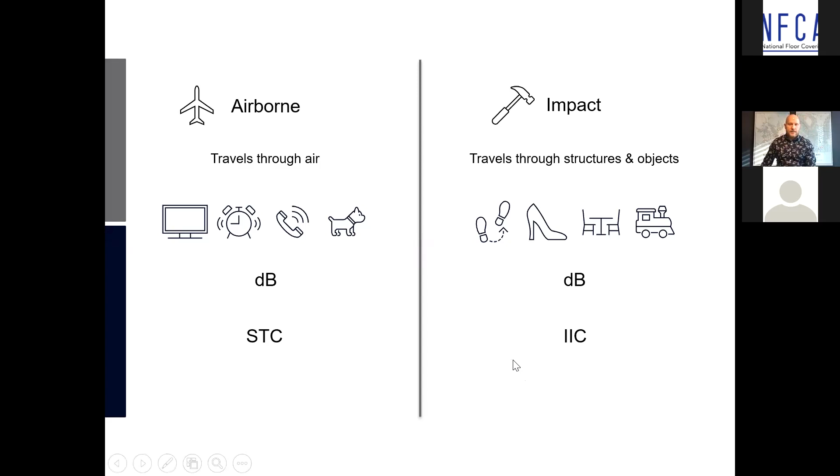Here's one thing I will mention about this. You'd be amazed how people will confuse the two or not necessarily know what the real issue is or where it's coming from, and they almost put it all in the same basket. Understanding where your issue could come from or what you're more concerned with can go a long way, because they absolutely do not work the same. The principles aren't the same. They're related, but they're not the same. So ultimately, anytime we assess a situation, you have to understand there's two, they don't work the same, therefore the treatment may not be the same. So looking into the fine print goes a long way.

It's all direction. So one of the differences with the STC and the IIC is the sound can originate from everywhere, meaning you could be transferring the sound from the unit on the left side of you to the right unit, top to bottom, bottom to top. So for example, if you're in an existing building, you're saying, my neighbors are making noises. Well, is the sound coming from underneath? Is it coming from the top? Is it coming from the side?

So depending on the situation, we'll understand that the STC is all direction, hallways to a unit, whatever it may be. And it's also related to a wall-to-wall assembly or a floor ceiling assembly. So it's always about the assembly. We'll touch on that a lot on March 9th, but one of the biggest mistakes we see is not understanding how the sound actually works, where it's coming from, where it's going, and what it is going through. So it's always wall-to-wall assemblies or floor ceiling when it comes to the STC.

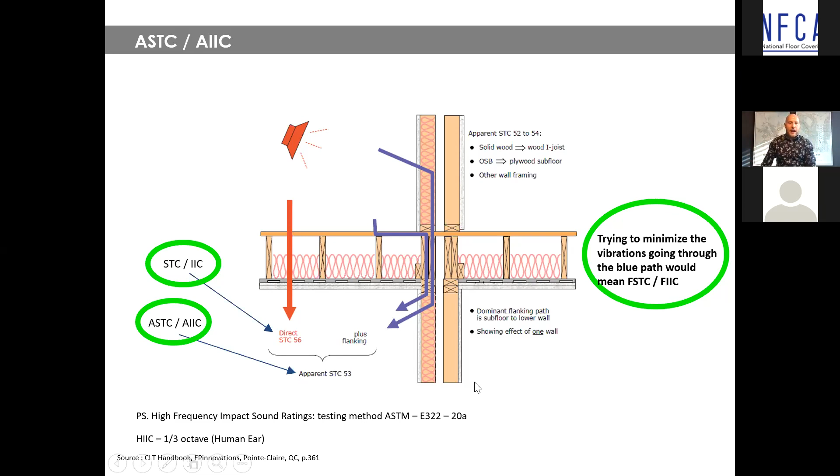So what I'm saying is, yes, there's the STC and IIC, same thing with ASTC and AIIC, but we're able to go even more in depth as far as analyzing where we're more prone to the sound transfer, which frequency may become more problematic, and fix it at the design stage. So just to give you an example of how deep we can go within the science, okay?

Building code requirements and recommendations. Chris, can you do me a favor, please? I'm not going to go into the chats. If ever you see questions coming in that you think I should answer on the spot, don't be afraid of jumping in there. Yeah, absolutely.

I just was going to comment on the previous slide. What you're saying there is, there's always been value in dealing with this at the design stage. If you want to stop noise transference meaningfully, the designer has to do it. By getting very targeted about how you could do that, you've upped the value even more of dealing with this before the building is built.

Without that sort of approach, construction is so guilty of being reactive as opposed to proactive, and we try to deal with these problems as they crop up. And that's why the person rolls into the flooring showroom and says, have you got an IIC of 1000 yet? I need that. Do you know what I mean? Absolutely. And so again, the data and what comes with the data, we'll talk about in a minute, looking at what the building code recommends or requires. But you're 100% correct, Chris.

Speaking of which, the code in Canada, we'll focus on that for a minute. The STC is required by code, and the number's 50. They also recognize the ASTC, so it is 47, basically 3 points less. The recommended minimum STC is 55. In the acoustic world, very rarely do we see people shooting under that. Usually we'll see people trying to shoot within that recommendation, if not higher.

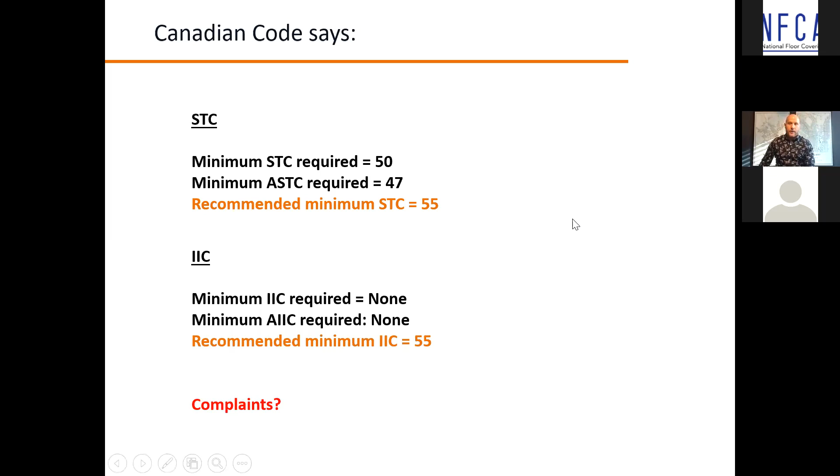So we are seeing a lot more, and the percentage I shared earlier of noise complaints and whatnot, I'd be willing to bet anything that 90% of those complaints are IIC within that same ratio. So once again, food for thought into wherever and however you're working on that.

To touch on what you said, Chris, to see high numbers, and the flooring industry could not be more guilty of this, and we are quite frankly trying to change the game and have for years, does that mean that all of a sudden, if you have a high number on a product, an underlay that's claiming a 76 IIC as an example, is it a guarantee of high performance within your building? Absolutely not. Absolutely not.

Can these numbers be achieved in my building? I don't want to conclude too fast, but I would say that anytime you see anything over 62, 63, 65, that's pushing it on any of the STC and IIC, there should be a red flag right there. There should be a red flag that it's virtually impossible to achieve unless you have a wicked carpet tile or a 1970 shaggy carpet.

So ultimately, the hard surface flooring industry particularly, there's no way any structure with anything we see in Canada would shoot much over these ratings in real life. So we obviously have a problem on our hands and we need to fix it. And one of the ways to fix it is to understand how it actually works.

And ultimately understanding, which is the next point, what your floor ceiling assembly is, what is it capable of, where is it more prone to having issues, what floor covering are you going to be using, is there a ceiling, is there no ceiling? All these components put together allow us to come up with some suggestions on what the assembly could look like. But what's even more important is, what is the rating that should be associated with those assemblies? And I assure you that IIC 75 and STC 72 is not it.

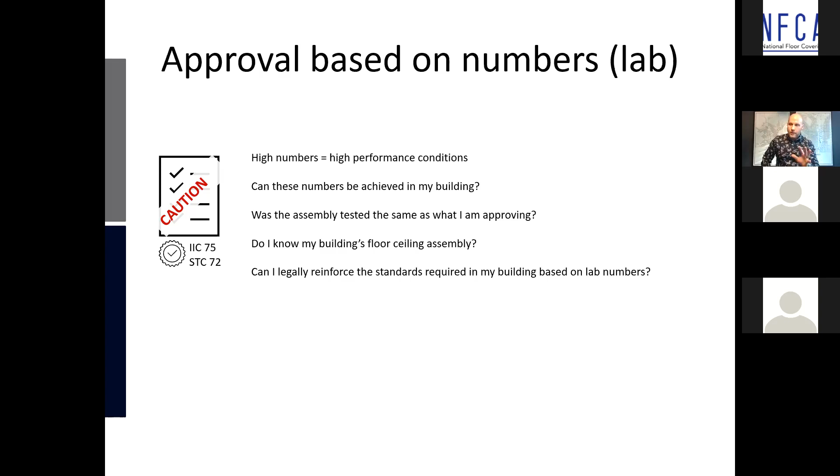Andre, quick heads up. You're at 30 minutes. Yeah, thank you.

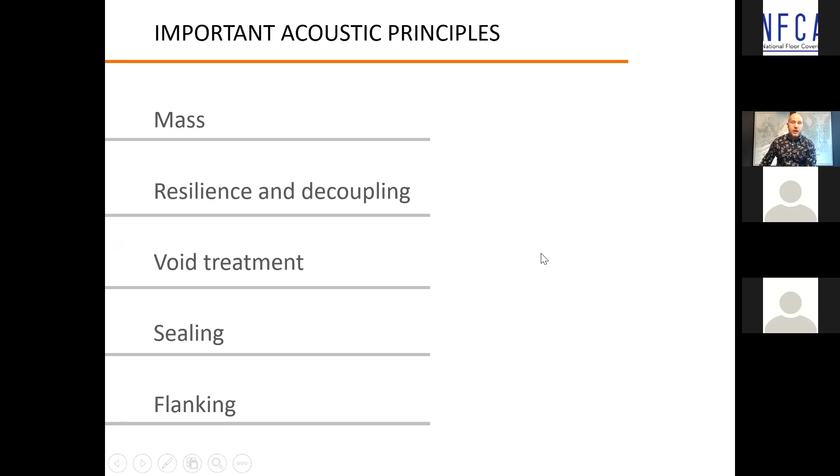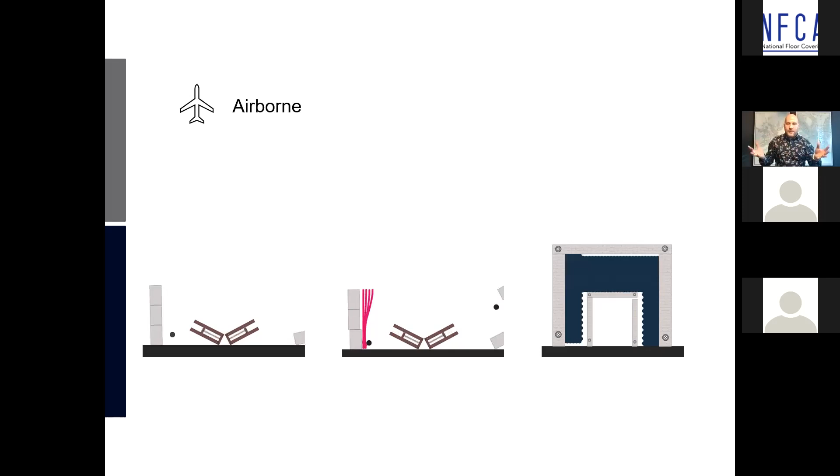That's true with vents, openings, even hotels that have big gaps under the doors. You can have the best door in the world, but if you have an inch of air underneath, you're going to hear everything that's going on in the hallways. So that's a very important principle too. Obviously, in the flooring industry, I'm not saying you have control over all of them, but it's important to understand them.

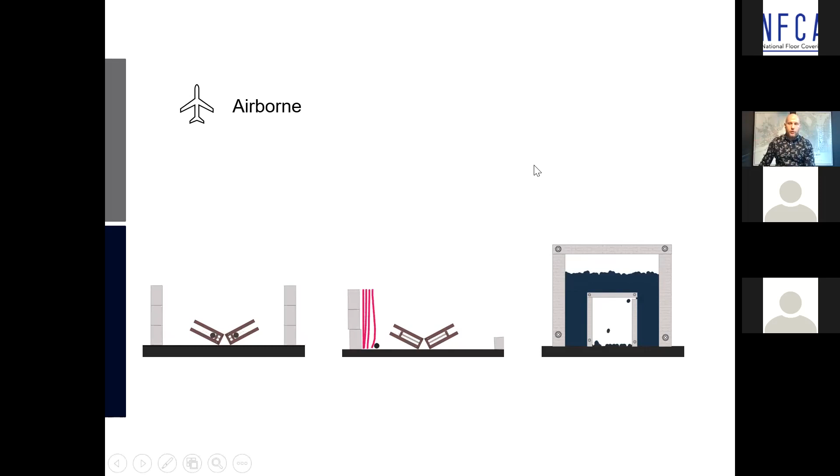Impact, by far the most neglected by a stretch. If you look at the left video, vibration, impact transfer is ultimately our worst enemy, because the impact, the IIC, will travel from one component to another and will make it to the unit below. So yeah, we're good on STC, we got some mass, but if we don't find ways to decouple the materials from each other, that's why carpet is so good. But if we don't decouple the components from each other, ultimately that's when we end up with an IIC that's quite low versus an STC.

So the key to this is, how can we find a way for the vibration to have nowhere to go? If you're on a concrete, you have one shot at doing it right, so we're better off picking the right technology. For example, in our group, we're not limited to one technology or one product line. We have a multitude because we're playing with decoupling, concrete, light wood frame, steel, mass timber. Are we more prone to high frequency or low? All these things come into play when it's time to slow down the impact transfer.

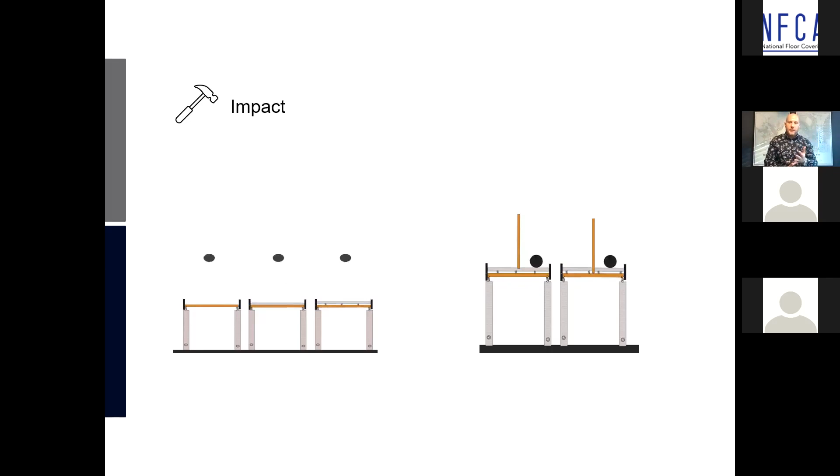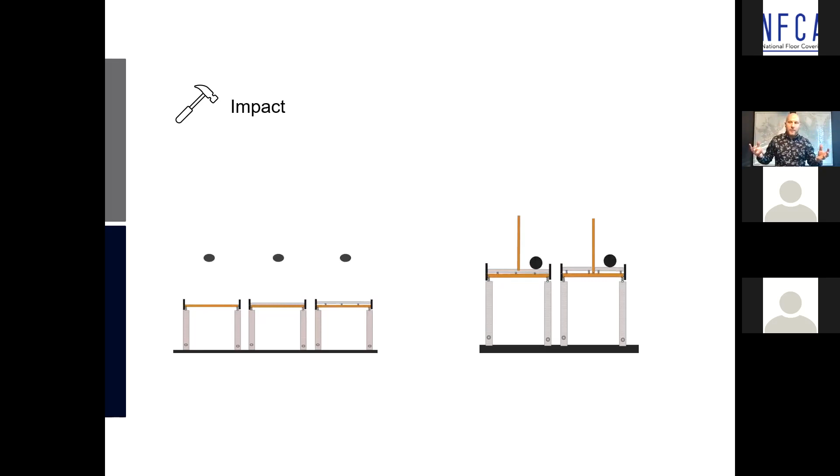Two things you guys are familiar with that work the same way: electricity and heat. For example, thermal. If you don't put your hand on the element on your oven, you're not going to burn yourself. You create a physical contact, you will. So bottom line is, acoustics on the impact works the exact same way. This is also related to flanking. If the vibration's making it to the structure, it's making the whole thing vibrate, and it's our worst enemy. So the sooner we control that vibration, the closer to the source of the impact we control it, it does not have time to gain speed through the structure.

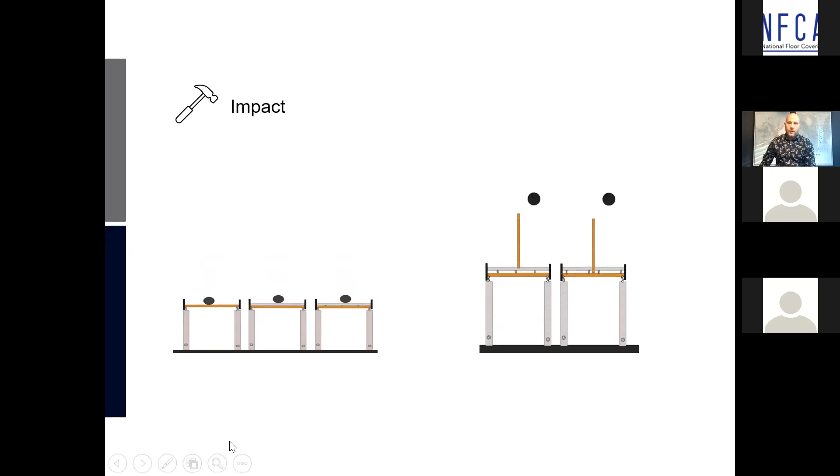I'll do a quick demo for you on this, so hopefully you'll hear well. You see my beautiful cooking plate there. So music box, nothing special about it. What I'll do is I'll play it when it's not touching the board, then I'll play it when it is touching the board, and we'll see if you guys can hear the difference. So hopefully it came. I tested it with Lee and Chris before, so it worked.

But ultimately, what that displays is, if there's a gap of air, air is not a good conductor for vibration. As soon as you introduce it to hard surface flooring, a hard substrate, I don't care if it's a concrete or gypcrete topping, no matter what that is, density within anything between the floor to the ceiling, drywall, if it's not decoupled, you're going to end up with a lower IIC. That's how the science works. So it's a matter of picking the right thing at the right place.

Structure types. I'll share some data and information, and again, this is coming from 1,000 tests in our database and 20 years of doing this in different structures. And why is there a section on structure? You'd be amazed how often we see people saying, well, I'm on a concrete structure, so I don't have to worry about the IIC or about sound. You'd be amazed how many complaints we see that come from concrete structures or concrete towers versus others. So they're not free from complaints. I'll give you some examples on that and what we're looking at.

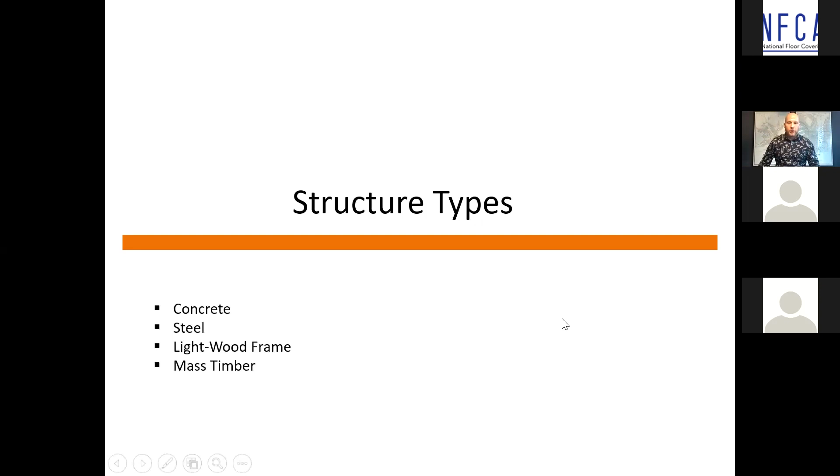Concrete, obviously mass, we have a lot. Steel, same thing. Light wood frame, not as much. Mass timber, not as much. So as far as flanking, lower risk for sure of the vibrations, the building's heavier. Steel is high risk, it's metal. So a steel structure, we need to pay attention to the principles, including decoupling. Light wood frame, even more true, and mass timber. Okay, so it's extremely important out of the gate to understand what we're working on. What's the structure going to be? What are we going to be more prone to transfer versus something else?

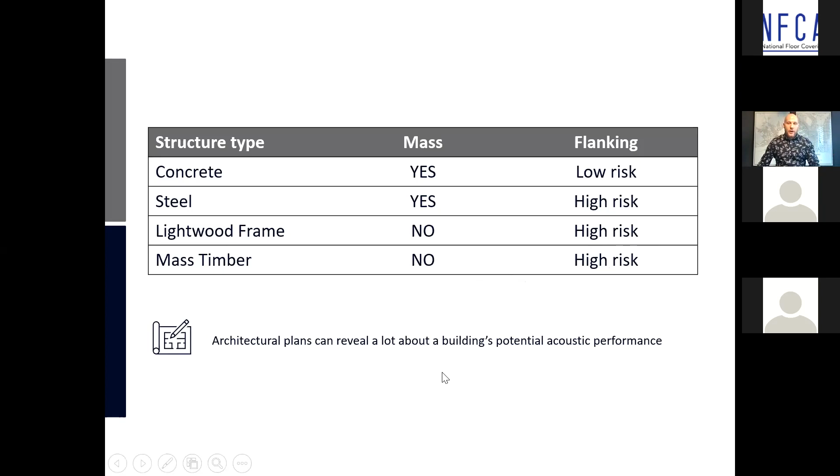As far as concrete, quickly, large spectrum of efficiency. The IIC without any floor finish, 28 to 36. Of course, to Chris' point earlier, sometimes we'll see people trying to find an IIC 36 slab in order for their products to look great. But in reality we'll see slabs that will be 28 naked with nothing on top, or it'll go to 36.

So a polished concrete on its own will sound absolutely terrible when it comes to IIC, specifically the high frequency. The high frequency versus low frequency is more problematic on concrete than it is on anything else. So the low frequency, because it's heavy, is not as problematic. But the high frequency, high heels or hard soles on your shoes, toys, moving furniture that doesn't have any felt pads and things like that, is problematic.

You'd be amazed to hear an actual tapping machine on it. It goes right through. You still have obviously different thicknesses, framing levels, structural plans, but great for STC. We still need to pay attention to the IIC. This is, again, coming from 20 years of dealing with property management companies, existing buildings, and new construction.

So Andre, that 28 to 36, is that a 6-inch slab or an 8-inch slab or just a general statement? It's related to all of it, Chris, because depending on the thickness, I've seen 8-inch slabs shooting 28. I've seen 6-inch shooting 32. The bottom line is we don't always know. That's why there's a range. You're not going to know out of the gate. There's no guarantee that the slab is going to shoot 36, even though it's 10-inch.

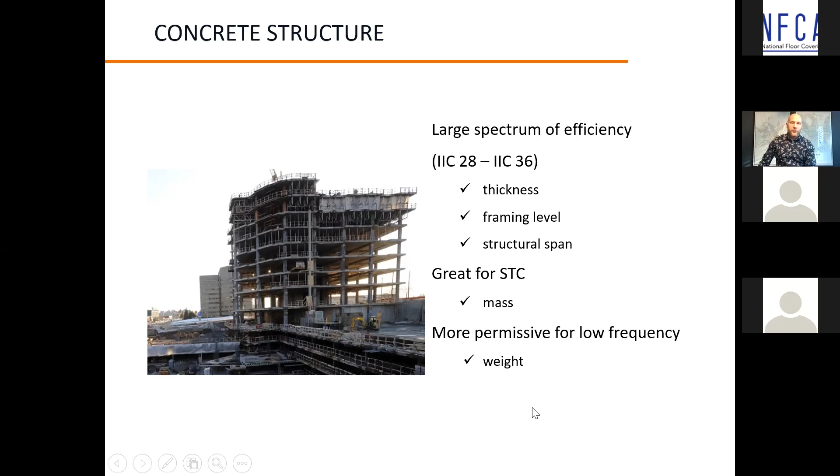Yeah. But the biggest point with that too, Chris, is it's not sufficient on its own. And the biggest issue is the high frequency. That's why the code even came up with the HIIC, right? So we can basically know which technology will perform better on what structure. Okay. Yeah.

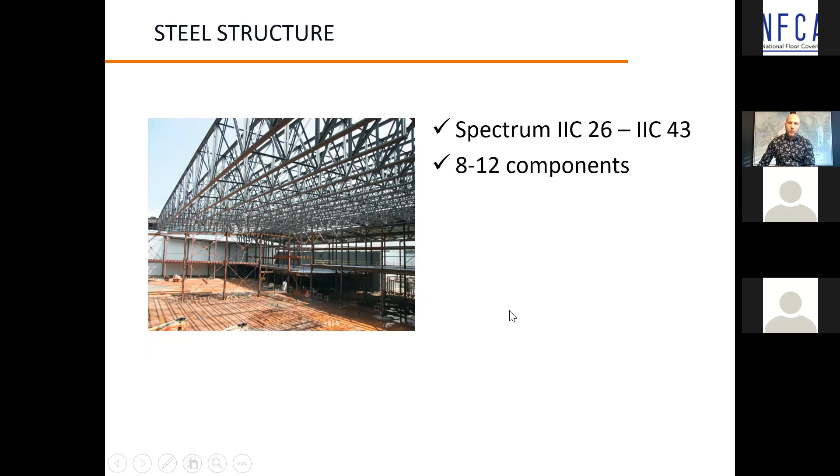This is the steel structure. Really quickly, 8 to 12 components. Again, 26 to 43 for that 4-inch of concrete. If you look at light wood frame, naked, no floor finish, 26 to 43 to start. It competes against concrete structure, usually very problematic, but it has the potential to outperform concrete buildings. We're doing it day in, day out, and I have tons of examples. If we apply the principles in a light wood frame application, we can do crazy things.

But right now, usually what happens is a floor covering, some kind of a pad, or an LVP or LVT with a backing, gypcrete or concrete topping directly over plywood, joist system, some insulation, resilient channels, 2 layers of drywall. Put things in perspective: AIIC 47 if you're lucky. So that's an important point to underline. You're saying there is hope for wood frame in this whole topic. 100%. That's really positive. I like that.

I was in a building just the other week where we got access to the above suite and the below suite. The below suite was where the complaint was being generated. So I went upstairs, and with the owner up there, we dropped a water bottle full of water from 2 feet onto the floor, it was actually LVT, vinyl plank. Then I went downstairs and phoned her and said, okay, do it again. I want to see this test.

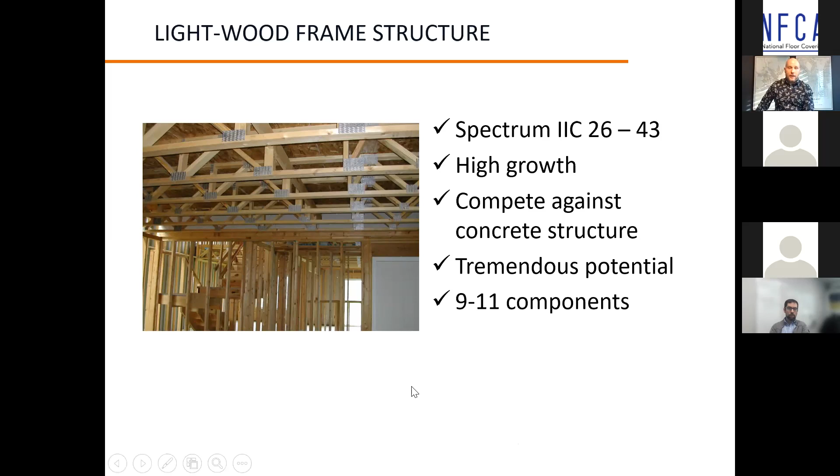I've seen floor systems and whatnot where we're not paying attention that will shoot 47, 49, and you would think you're in good shape, but you're actually not. So it could be a nightmare pretty quick, but there are ways, and I'll show you a few things in a minute, but there are ways to basically make a light wood frame building very efficient, both on STC and IIC.

Mass timber, that's the new kid on the block. You're going to start seeing this a lot more. Ironically enough, everything I just said about light wood frame applies. Meaning, if you look at the slab alone, especially if it's exposed ceiling, exposed mass timber, CLT, glulam, whatever you want to call it, in some cases, it will shoot on the IIC alone with no topping, as an example. It could shoot, we've seen 23. So you're starting with a couple strikes. So that means that if you don't have anything in the ceiling, you better do a heck of a good job over top. Good news is there's hope.

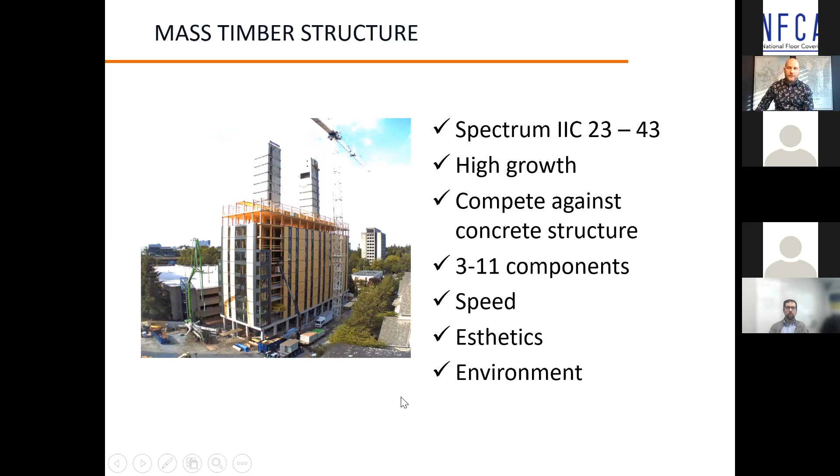There are assemblies that are designed to basically mitigate flanking, mitigate the STC, mitigate the IIC, high and low frequency. So there are ways to do that. But it is something that we're seeing a lot more of. We're currently working on many of them. And sound is by far the #1 concern. No questions asked. And that's a good thing because some people paid the price a few years back when they actually started plowing the trail. So we're going to start seeing a lot more mass timber buildings.

And just a reminder, the National Building Code advisory, it's not a requirement, it's just a recommendation, is 54 or 55 for IIC. Yeah. 55. And honestly, Chris, it's a heck of a battle to get there with mass timber with exposed ceiling. If you put a ceiling, you're fine. But with exposed ceiling, it's all about knowing what the expectations are. So obviously, we're all about mass timber. I love the idea of using wood, but you need to ask these questions, and we need to have these conversations at the beginning, not later on in the process. And that's something I'll touch on March 9th.

So modern minimalist kind of design approaches don't lend themselves well to acoustical issues. Correct. We start paying attention, we work together, we're collaborating with the right people, you can do awesome things. And it's better than having to figure out the solutions after the fact when everything's installed. So that there's no doubt. Very quickly, I'm just showing you some potential ideas of what that could look like.

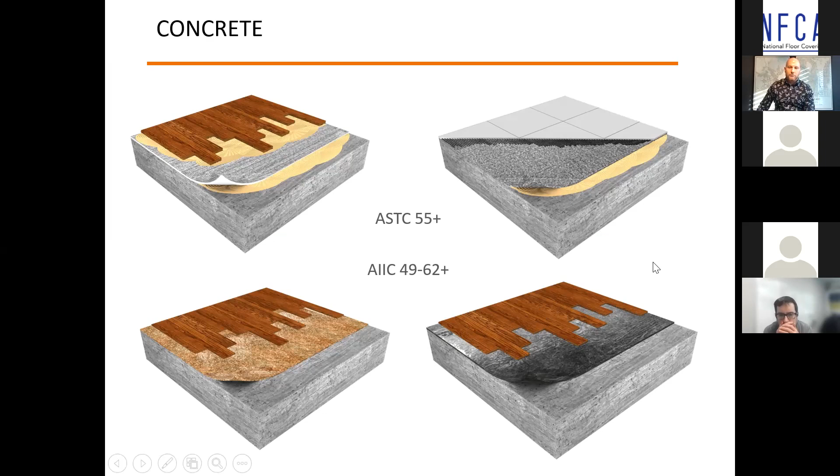Again, I've mentioned concrete slab. You only have one shot at doing it right for the IIC and for the high frequency. So it's not as easy as saying, I'm just going to use a 3 mil foam, it might save the day. That's not how that works. It's using the right thing in the right place. Again, I've touched on that and I have stories, I have examples of real builders that were stuck in the 47 range on the IIC, and overnight we brought them to 60. By the way, without a topping.

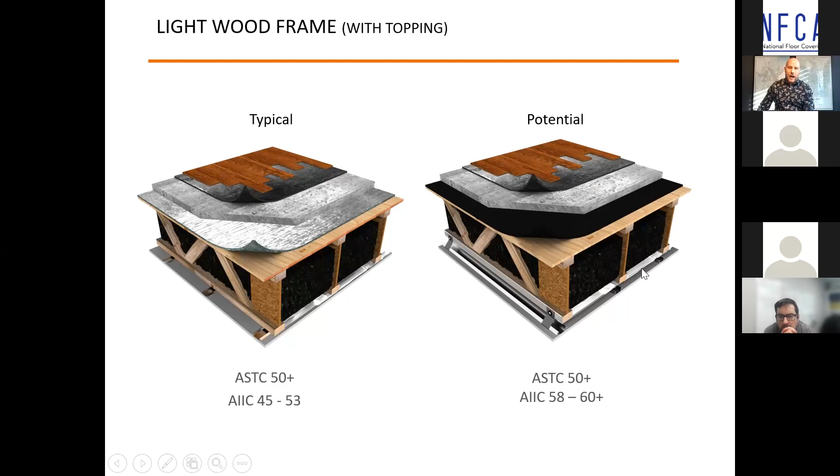So as you can see here, there are new ways, new technologies available. And that's even more true when the weight is a concern. Victoria, BC is an example. We do a lot of work there. We work with BC Housing. So there's a lot going on there, but there are new ways to approach sound insulation with the flooring industry and in the construction industry that can bring the comfort that people are looking for without necessarily having to change everything we've been doing. So there's hope, especially on the light wood frame and the mass timber industry.

Andre, I think you should make the point here. If you're able to up the IIC rating by 2 or 3 or 5 points, that is a significant achievement. I mean, the whole IIC rating system operates kind of like the Richter scale, right? A jump of 1 is a huge difference. Exponential. There you go. Absolutely.

I'll give an example, Chris, since you mentioned it, going from a 47 or 50, like the number of times we see an 8-inch slab with a laminate floor that shoots 50, you'd be amazed. People think they're in the 60-ish or 70s. It's not even close. So bottom line is, it's fairly easy to go from 45 or 50 to 52, 54, 55 by using the right thing.

In some cases, it's not even more expensive. It's just a matter of using the right technology that's going to cover you on the curve. So if you don't understand where you're prone to transferring sound, you may control something that's already controlled. So the reason that we do what we do is we're able to look at basically what's more prone to transfer and where do we actually need to compensate.

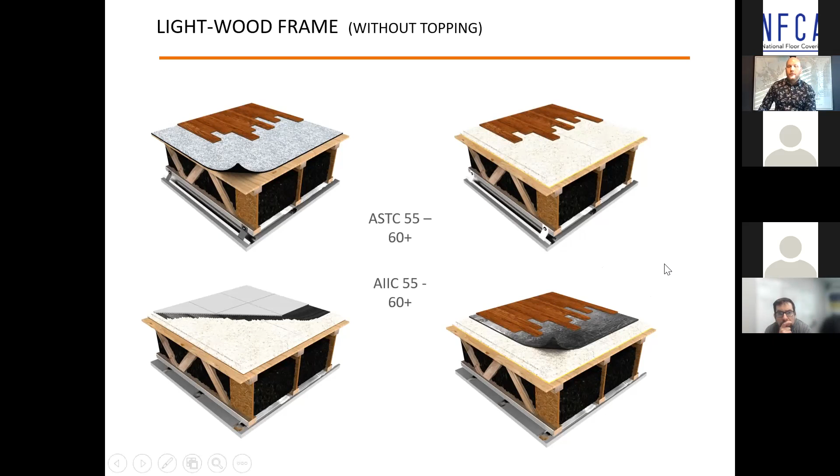Right, because the code on the ceiling, ironically, because of fire, will put their foot down a lot. When it comes to sound over top, there's the typical topping and 8-inch slab, but the new innovative ones, like you see in front of you, we have all the data you may need, but that doesn't mean they're listed with the ULC as we speak. Okay, so there's no association or place, like a website, that you can go to? Correct. And by the way, we do a lot of buildings with those. Okay, thank you.

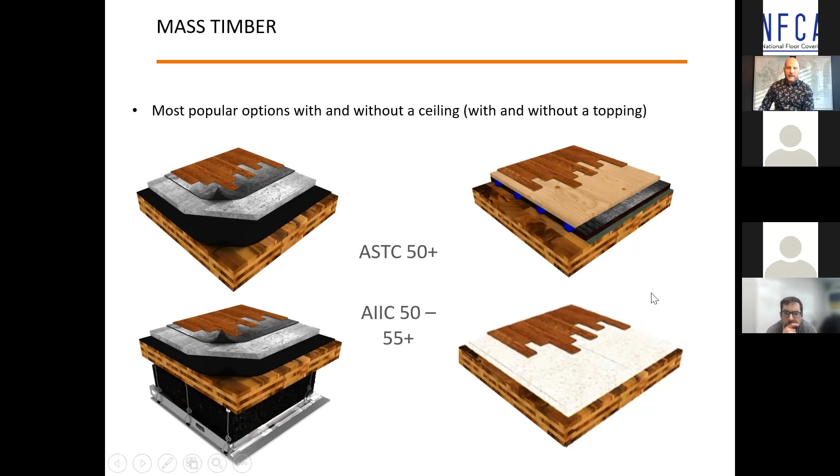And this is basically on mass timber, because I don't want to take one minute more. These are mass timber assemblies. Once again, dry elements with a topping. There are ways to do a heck of a good job, avoid complaints, and make sure that the building has the reputation it needs to have. So again, this is a small sample of some assemblies that are available in the market.

Same thing with steel structures. You'd be surprised how much steel structure is prone to flanking. So we need to control flanking out of the gate. So there are systems in the ceiling and under the floor, insulation. I just spoke to a builder in Victoria a couple of days ago where I made some recommendations on a Hambro system for their commercial kitchen. They reached out and talked to us about it, so I made some recommendations, understanding what they were trying to do.

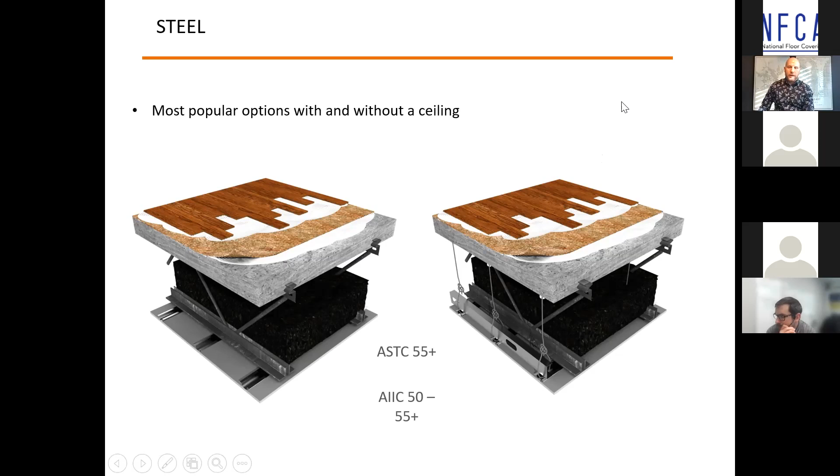And I know we're pretty much there, Chris. So recap and takeaways: requirements versus expectations. I don't mean to preach, but Mr. and Mrs. Smith do not know what the code asks for, nor do they care in 2022. So what should we offer them? Should a builder offer a little bit more value on that? We work with developers that are literally making acoustics their number one selling feature in their condos. That's what they talk about first, before anything else. That's where it's going.

That doesn't mean you have to be out of pocket. It means that ultimately people are willing to pay for peace of mind. There's no doubt about that, and we're seeing it day in, day out. Acoustics requires specific attention. The ratings equal an assembly. Understand the principles and try to apply them as much as you can. We're there to assist you should you need. Know your structure: concrete is not the same as light wood frame, steel or mass timber. What's your target? Then you can find your proper assembly and options.

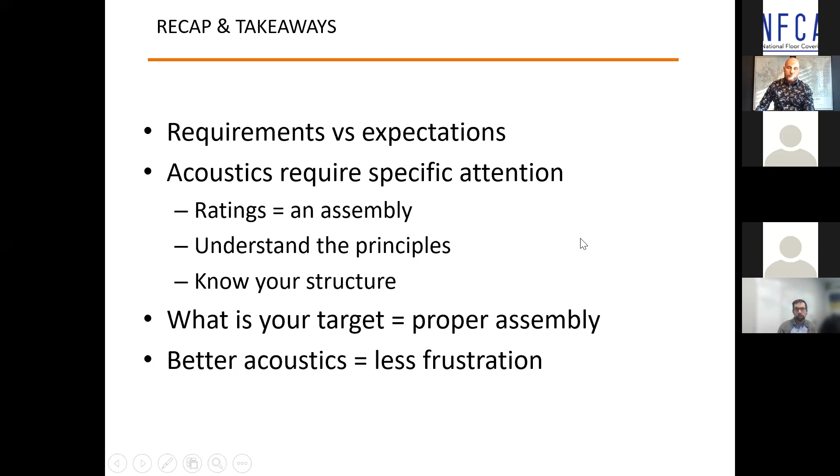And better acoustics equals less frustration. I could tell you stories all day long about stratas and people for whom it's a nightmare. And to some extent, we've decided as a group to change that and try to at least contribute to people having a little bit more peace of mind.

And before we go to questions quick, because I'll finish with this: if ever you are working on something, you have questions, or I know you'd like our guidance, go back to the first slide, obviously we would be happy. I got my whole team, Gordon Strachan from Vancouver, Christian Wallace, Ontario, and parts of the US. And I got my whole Eastern team too, Simon and Sebastian, Vincent, they're out East that can help out.

Any questions? Tremendous. There's a couple of written questions here. One is by Dawnita. Where did that question go?

Hang on. She asks, so are you saying that there is no standard for the test results to be tested? Are we talking about no standards for the IIC? That's correct, yes. Okay. No, there's not. There's no requirement in the Canadian Building Code whatsoever. There's only a recommendation. So by law, you're not forced, it is not mandatory to do anything on the IIC.

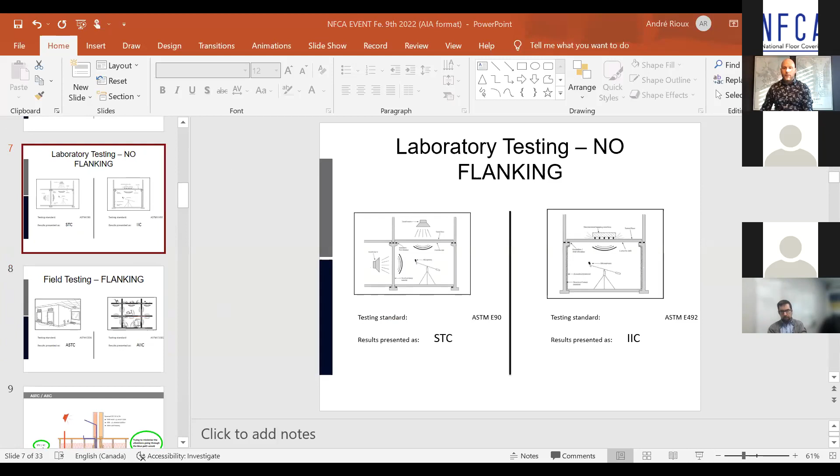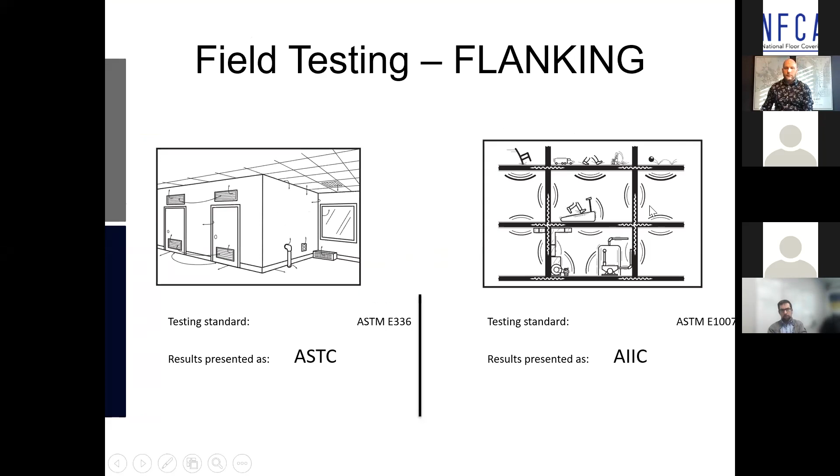Mostly we only see a couple, like there's ASTM E90, there's ASTM E492. E90, you see them here? E492, oh, there you go. E90, that's laboratory testing as an example. And just so everyone knows, these tests are not likely to reflect what you have on site in your multi-family dwelling. So don't assume that they do.

Well, not only that, because somebody's using the right ASTM testing method doesn't mean they're not controlling the environment. The question isn't necessarily that the test is not ASTM standard. The question is, I could test something using the ASTM norm, but decide to put ceramic tile over top instead of carpet, because I want to test a carpet pad of mine. I have seen someone test a carpet pad, and instead of carpet over top, it was a ceramic tile.

So yeah, the test and the norm is the same, but you're controlling the environment. Why are you doing that? People do that in order for the number to be higher, in order to sell more products. That's the only reason people actually do this. So that's why we need to look into the fine print of, yes, the standard, but also what was my assembly, because you can change one component within your assembly and it will drastically change the outcome of the result.

And I think all they have to do is just list it as modified. Name the ASTM and then say modified. Don't tell you how. And then people just look at the numbers and say, oh, you've made it. Yeah, and that's where the misguiding information comes from, Chris. You're right. Next question.